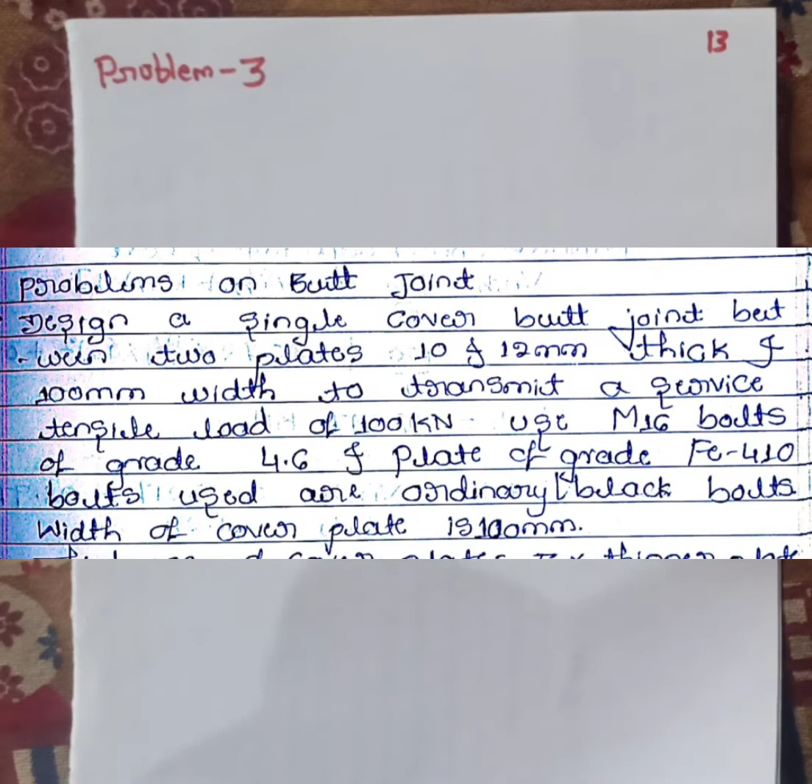Design a single cover butt joint between two plates 10 and 12 mm thick and 100 mm width to transmit a service tensile load of 100 kN. Use M16 bolts of grade 4.6 and plate of grade Fe 410. Bolts used are ordinary black bolts. Width of cover plate is 100 mm. So this is the problem we have here. They are asking us to join two plates with a butt joint, a single cover butt joint, to carry a service tensile load of 100 kilonewton.

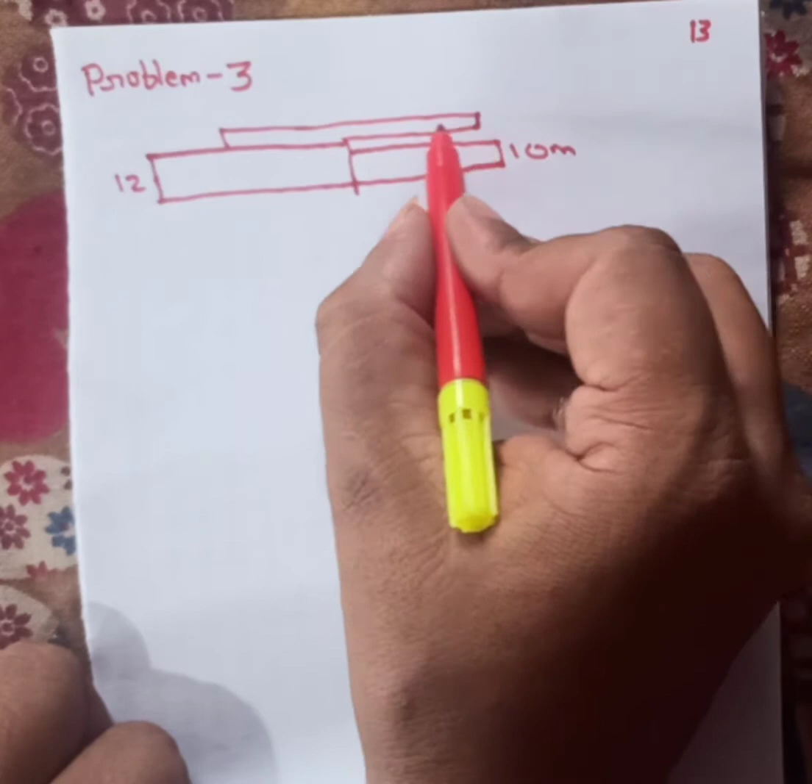So it's a butt joint. I'll draw the figure here. This is one plate, say 12 mm. There is one more plate, 10 mm, and we have one cover plate. So here we need to provide the bolts, whatever number of bolts we are getting.

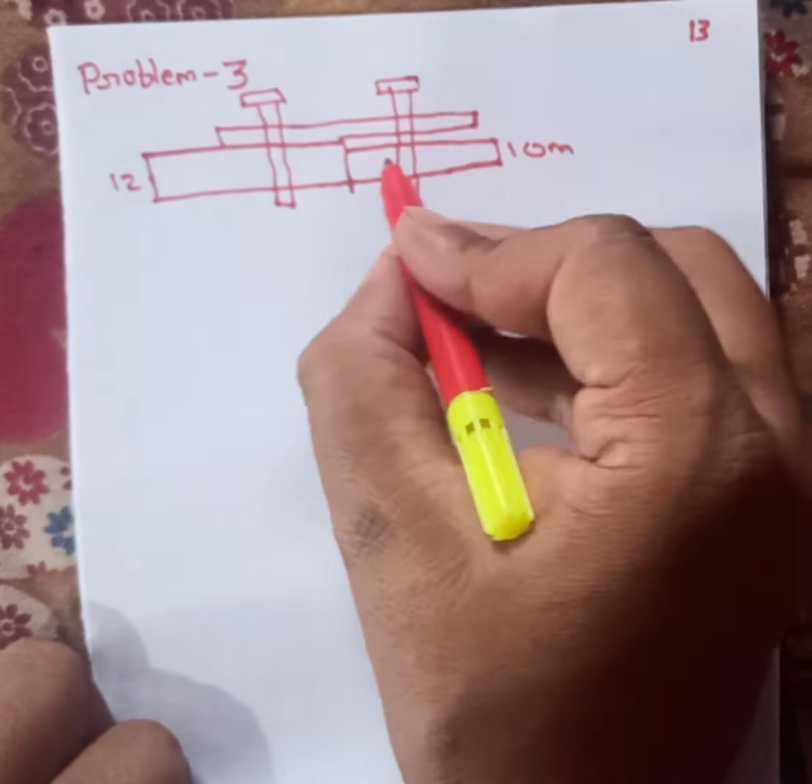So this space is empty, so this portion will be called packing plate. It is 2 mm. If it is more than 6 mm, then there is a correction. Remember, correction for packing plate.

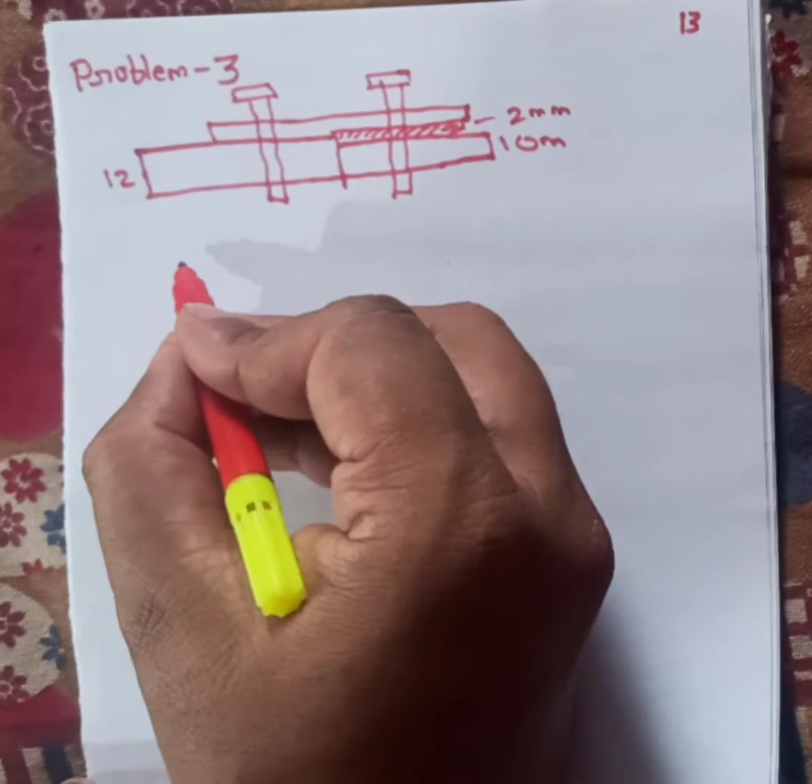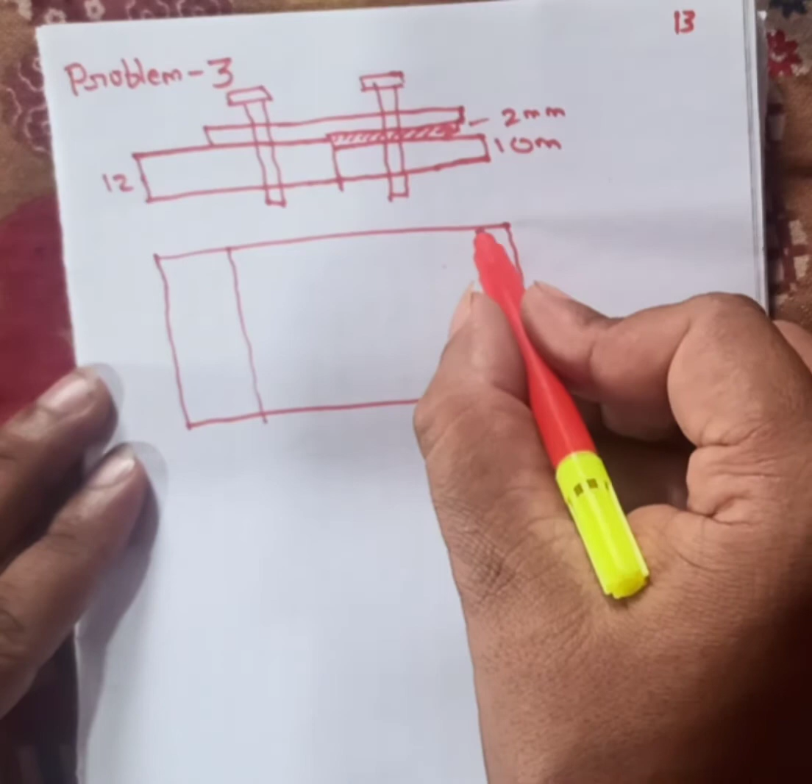Now when I see it from the top, it looks like this. So it looks like this, right? It is 100 mm.

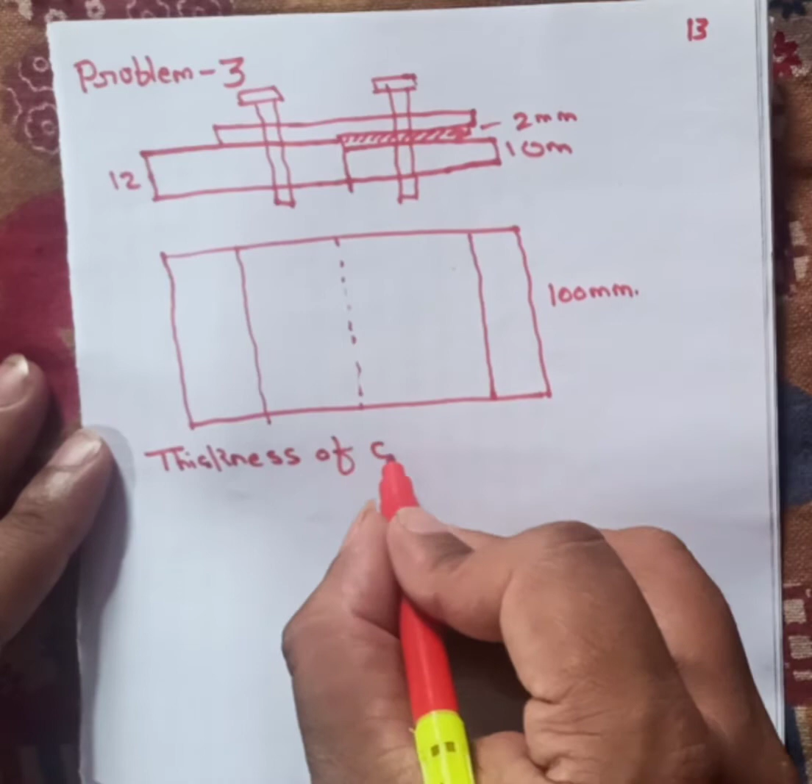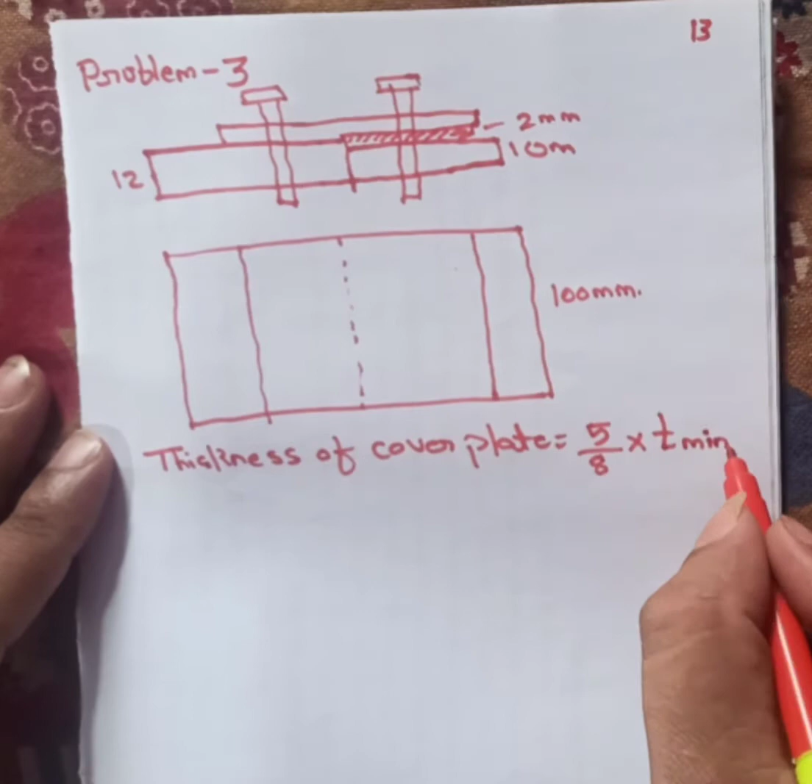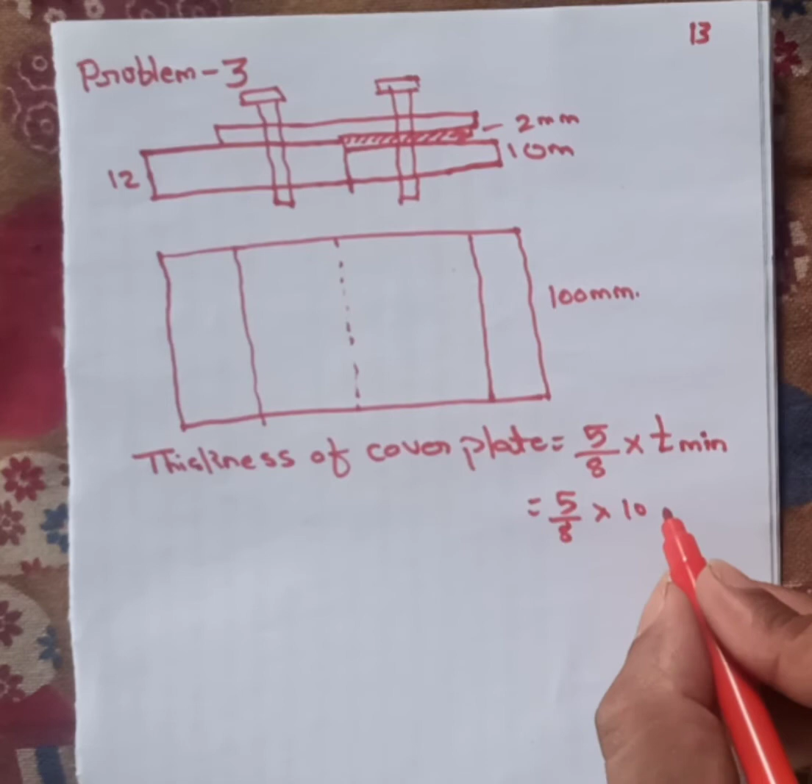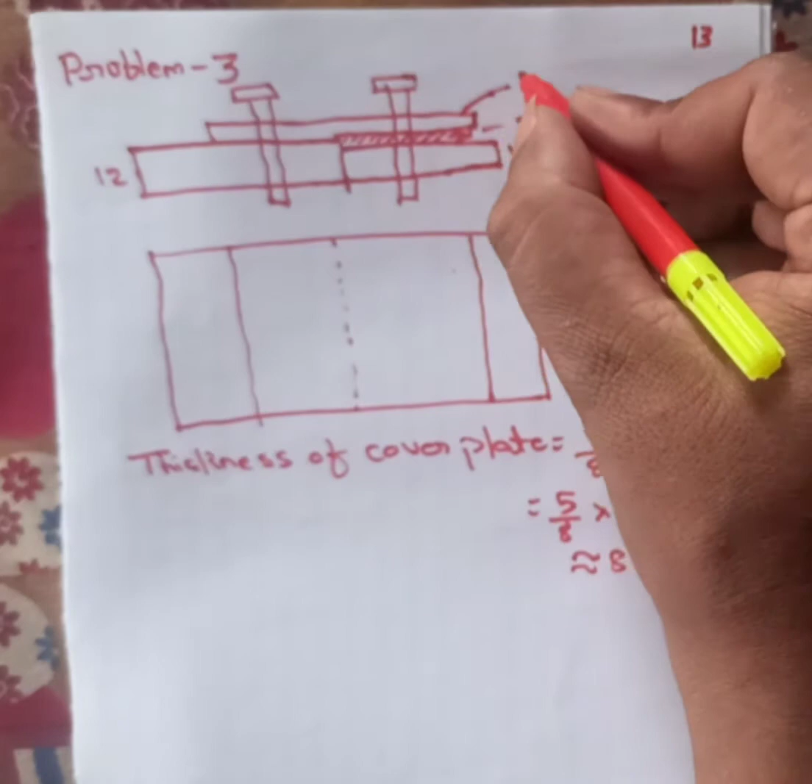They have asked us to use a single cover plate, the thickness of which is not given. So as per IS 800, thickness of cover plate is 5/8 of the thickness of the plate, whichever is minimum. So 5/8 of the 10 mm plate is for the minimum thick plate. It comes around 6.25 mm. So let us provide an 8 mm cover plate. So this plate is 8 mm thick.

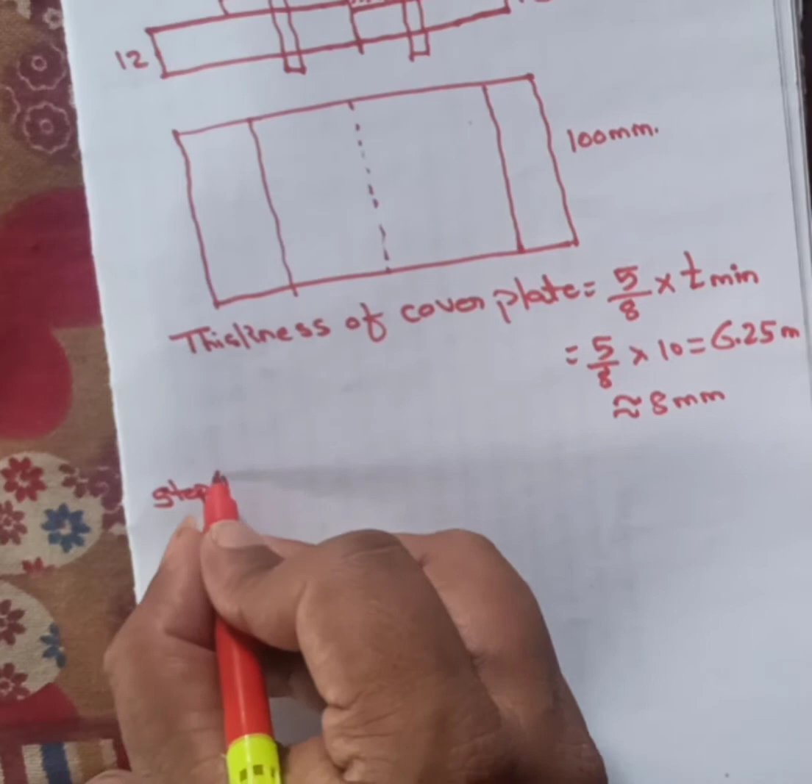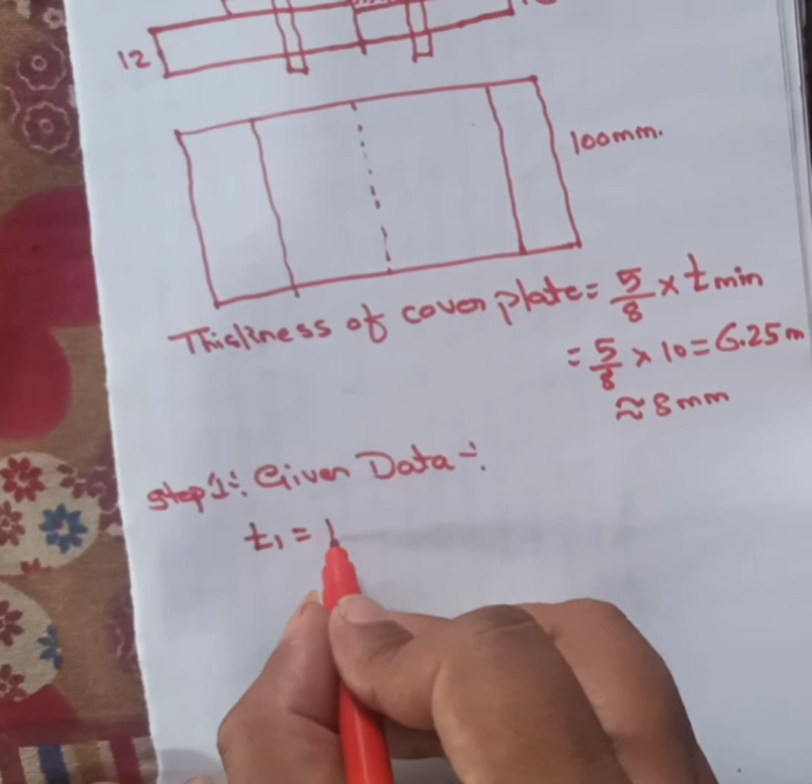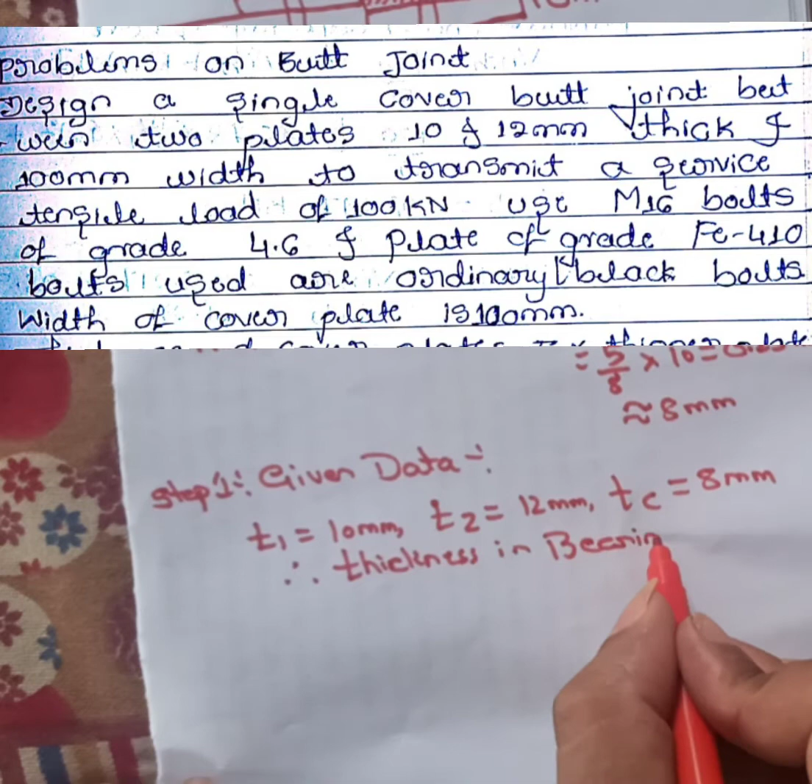So now let us write down the data which we have. In this question we have one thickness as 10 mm, one more thickness as 12 mm, and thickness of cover plate as 8 mm. Therefore, thickness in bearing is the lesser of these, which is 8 mm.

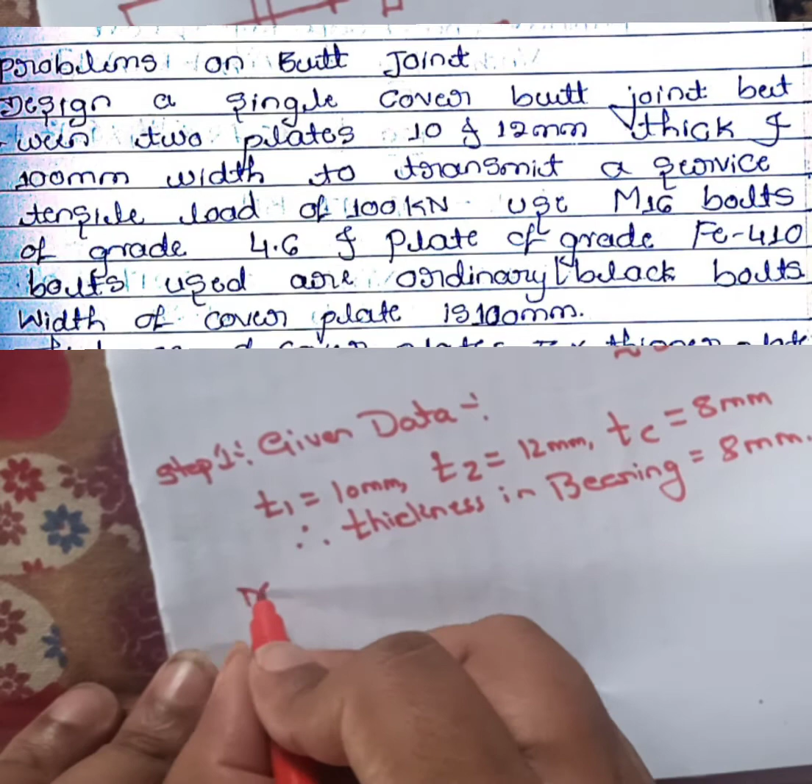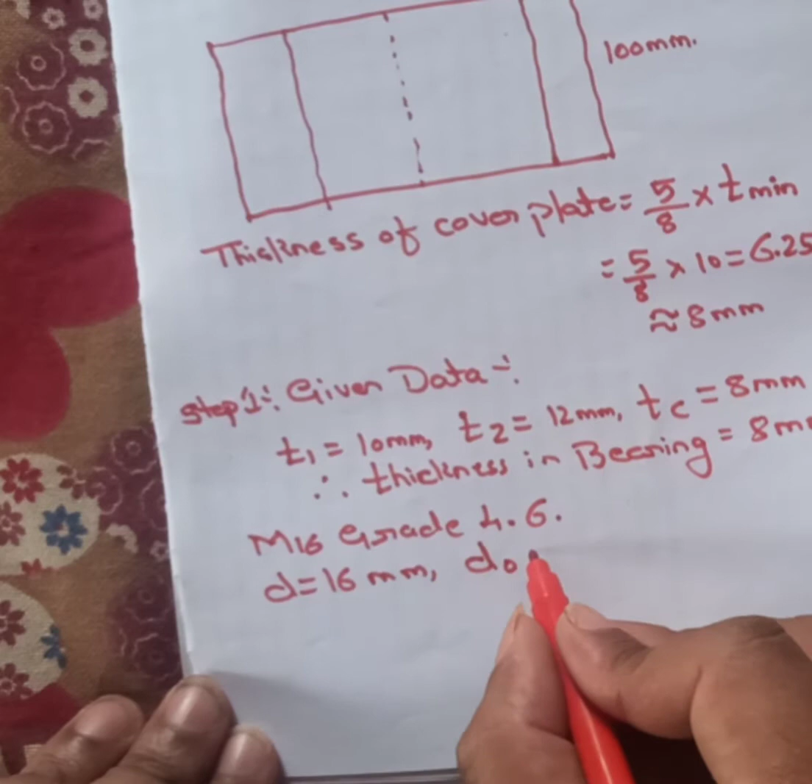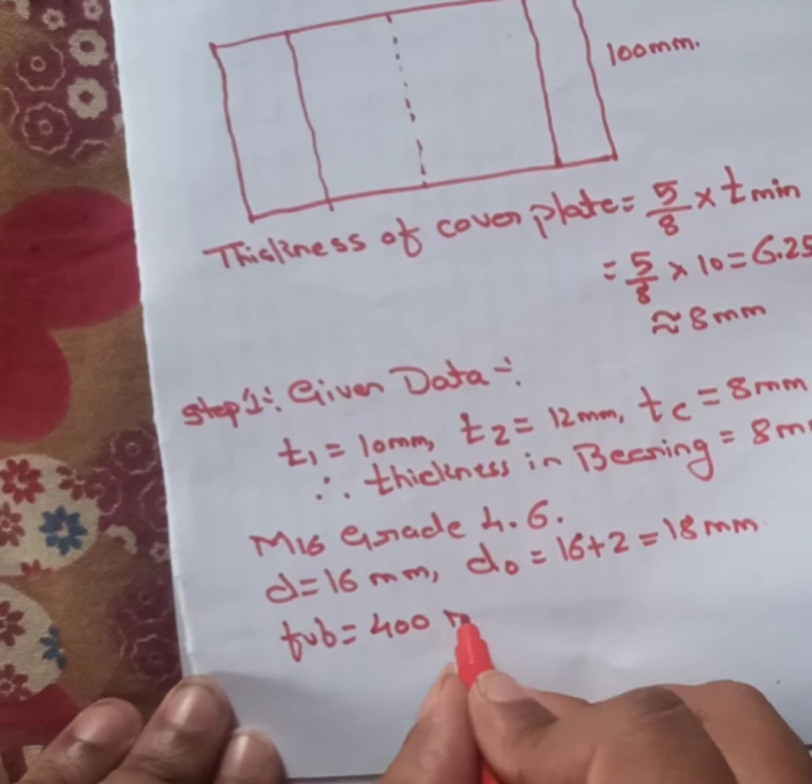Then they have asked us to use M16 grade 4.6. That means D is 16 mm, D naught is 16 plus 2 mm clearance, so it is 18 mm, from table number 19 of IS 800. It is grade 4.6, that means FUB, ultimate strength of the bolt, is 400 MPa. Here it is 4.6, 4 means 400. If it is 5.6, that means FUB will be 500.

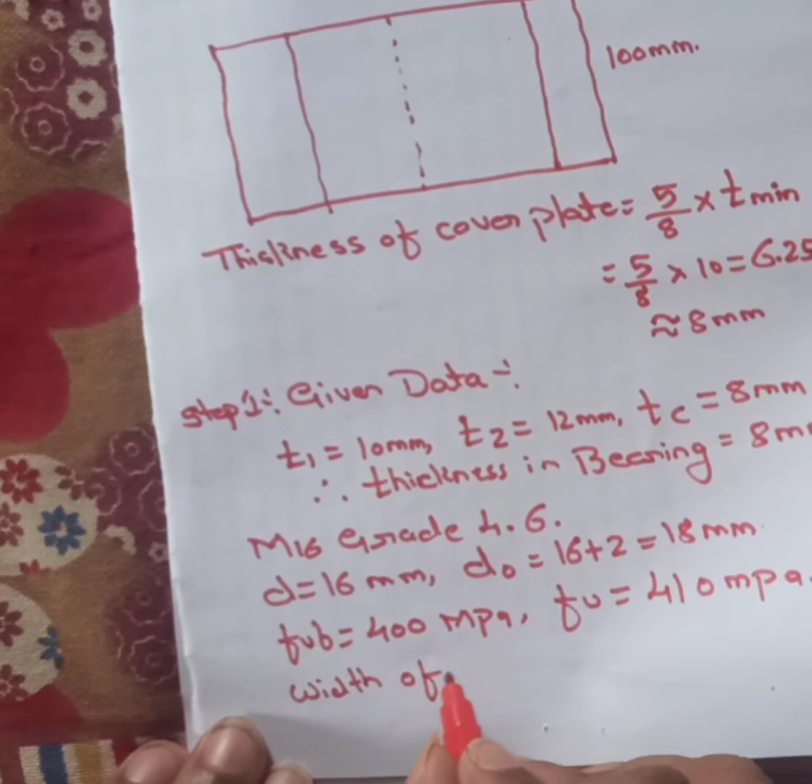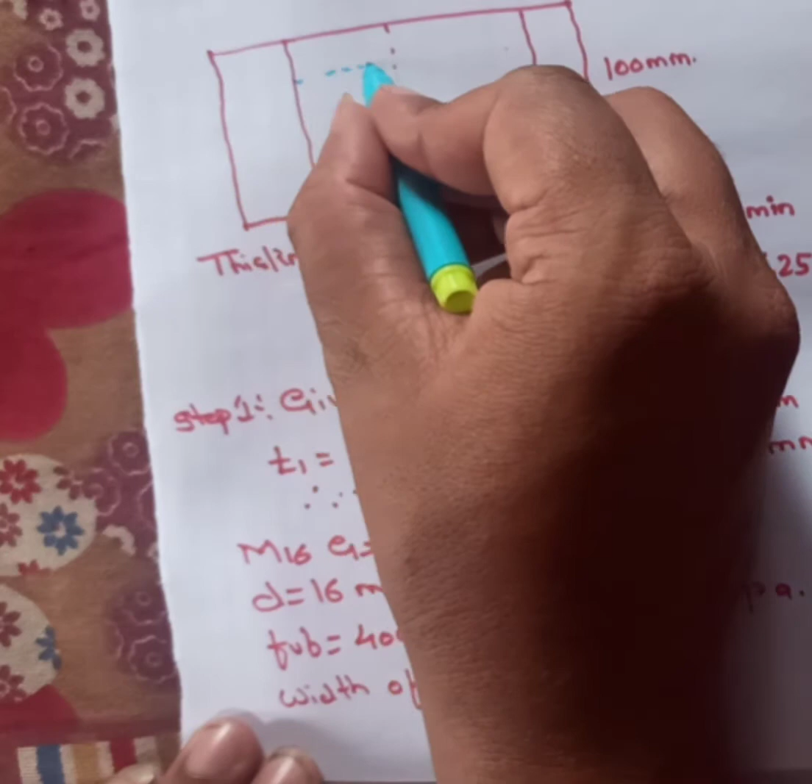Then FU of plate is given as 410 MPa. Thickness of cover plate is also given. Width of cover plate is also given, which is 100 mm. That means the cover plate, when we see it from the top, is here. So whatever cover plate we are providing, it is 100 mm.

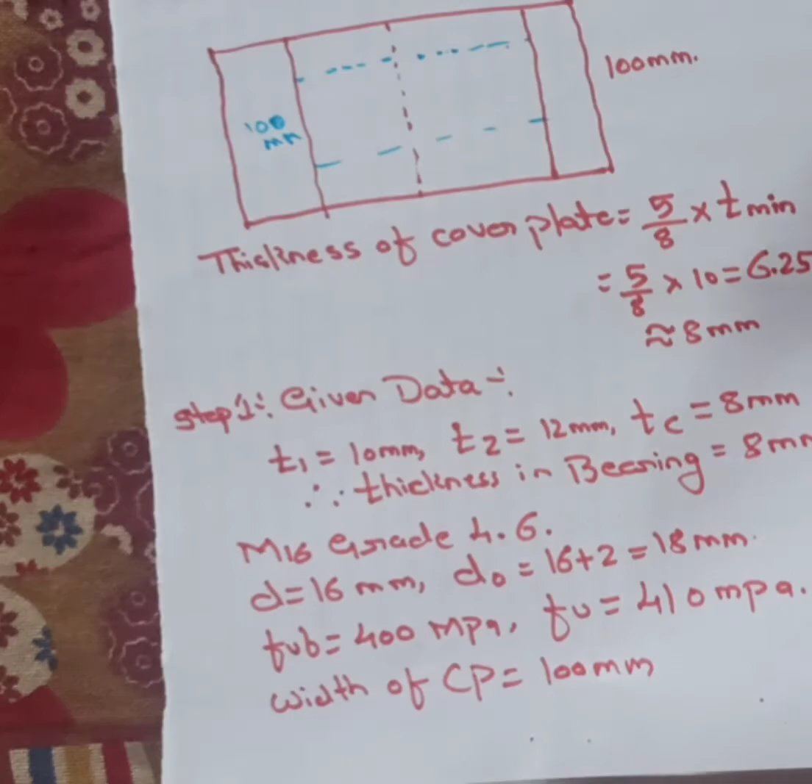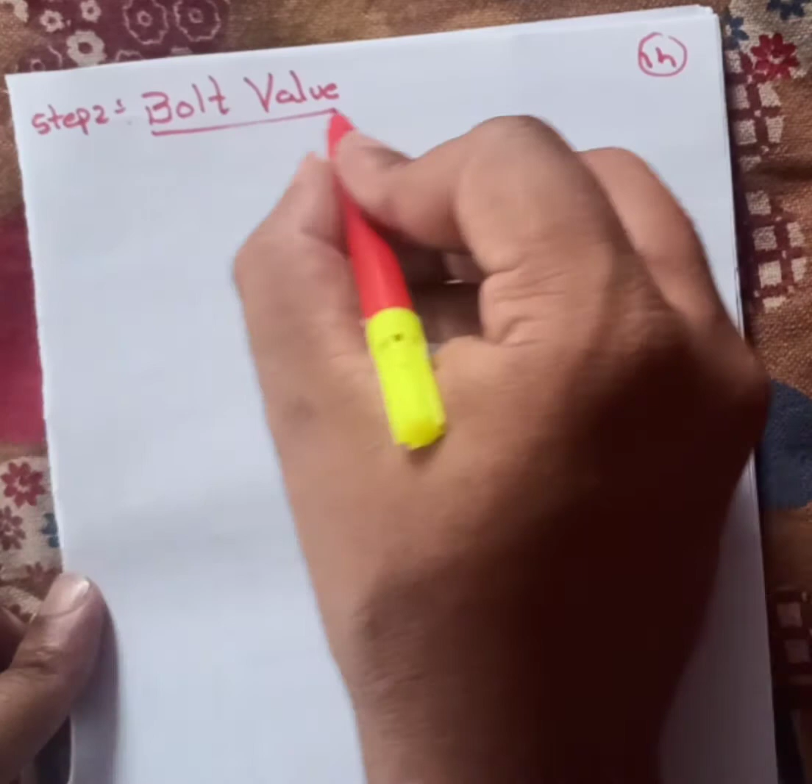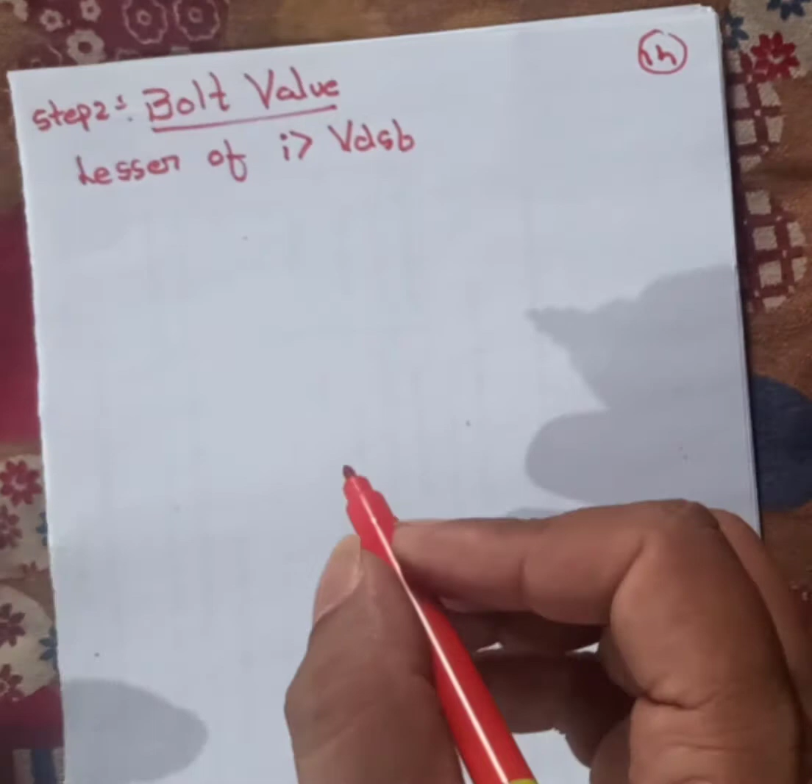Okay, so now we need to design it. That means we need to find the number of bolts, right? So to find the number of bolts, we need the bolt value. Bolt value is the lesser of VDSB, that is design shear capacity of the bolt, or VDPB, design bearing capacity of the bolt.

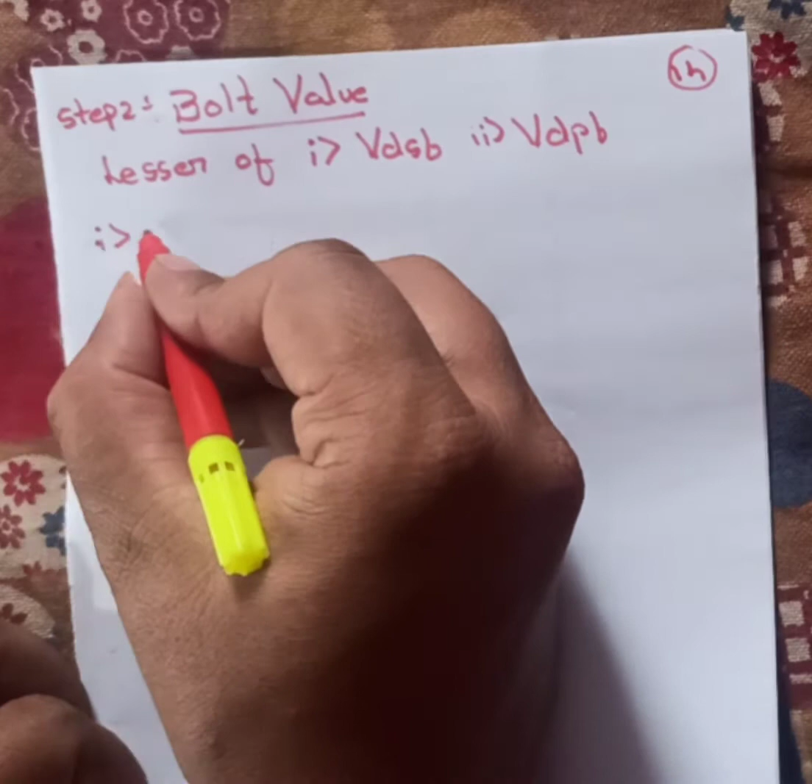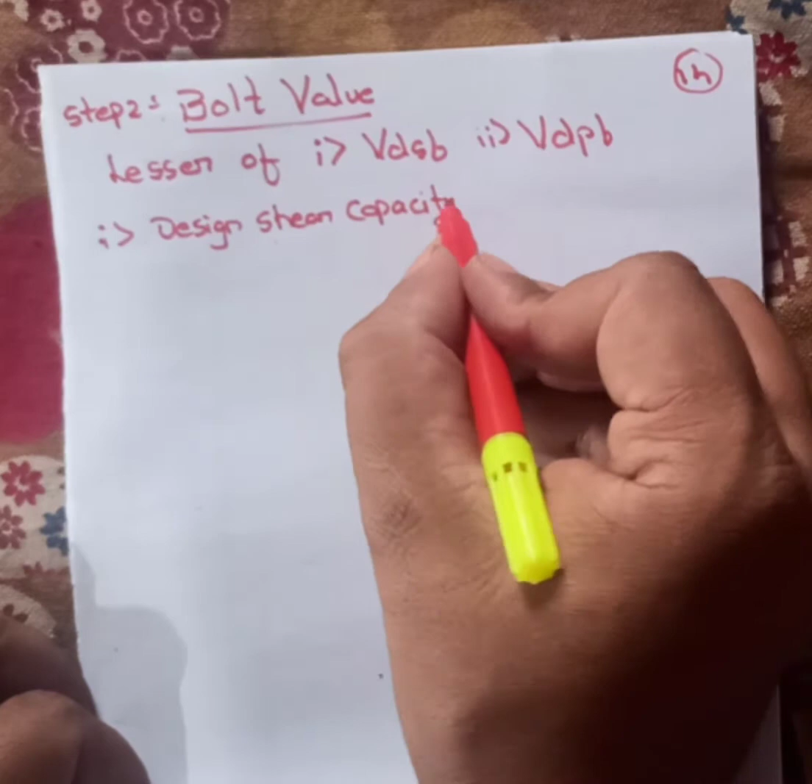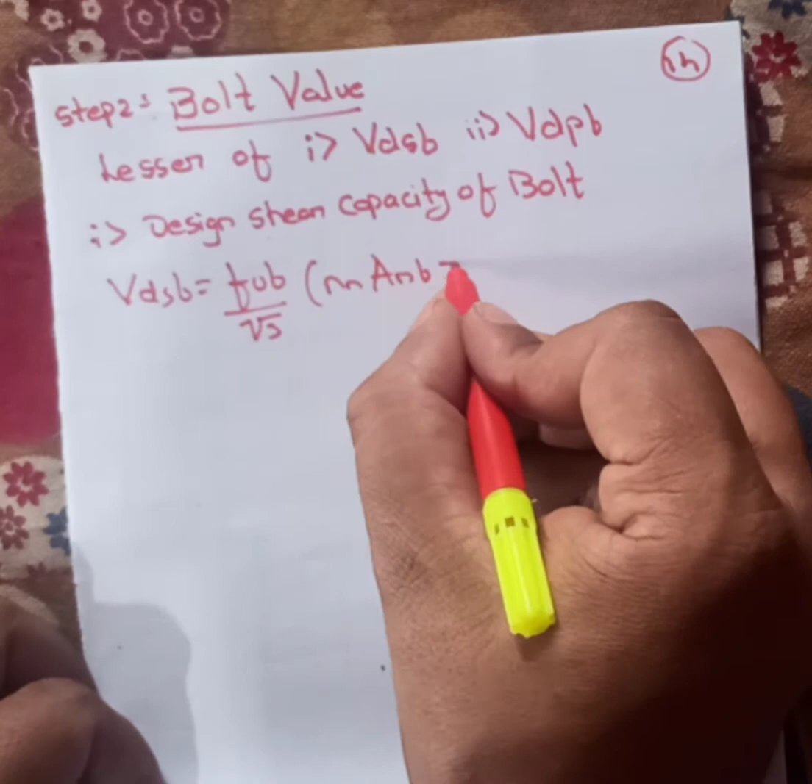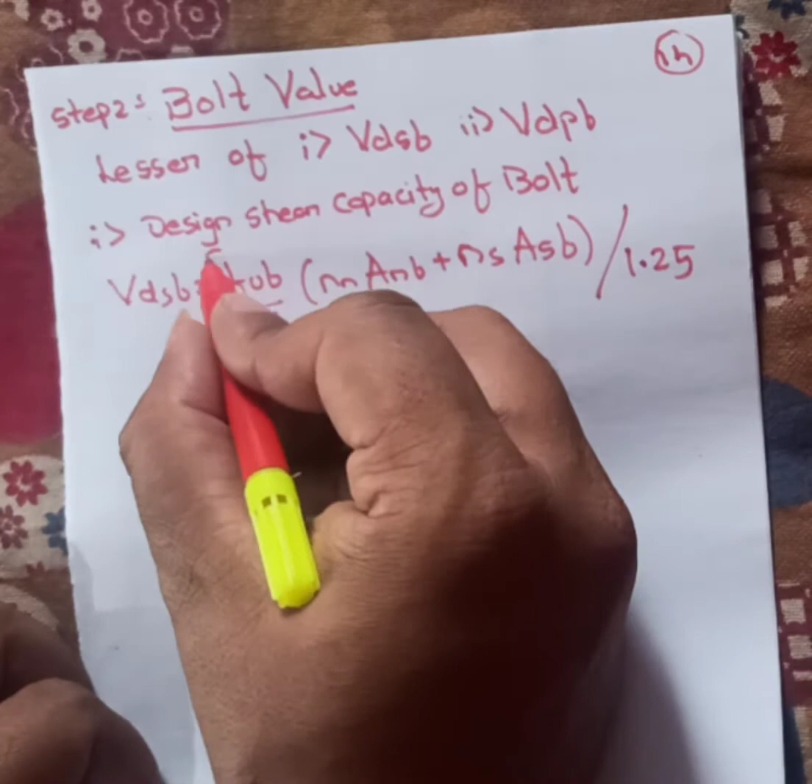So now we need to find these. First, let us find the design shear capacity of the bolt, which is given by VDSB equals to FUB by root 3, NN into ANB plus NS into ASB, whole divided by 1.25, that is partial safety factor. So here FUB is 400 MPa.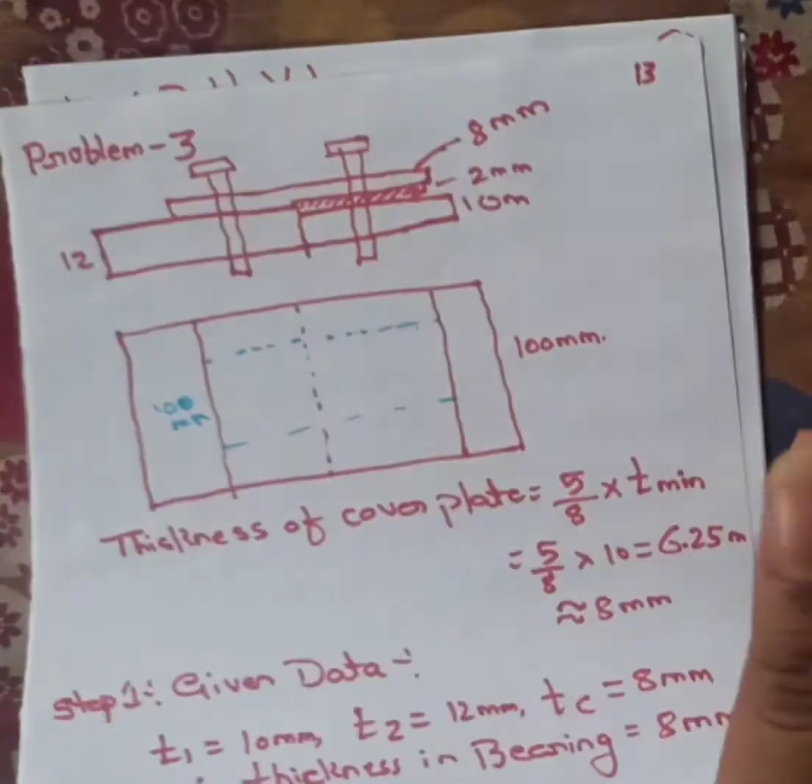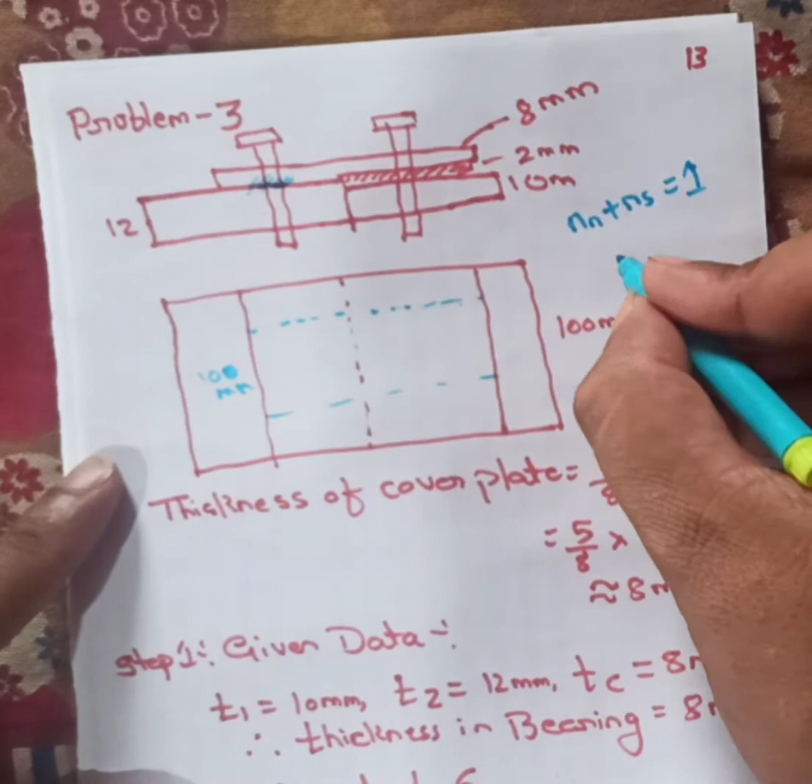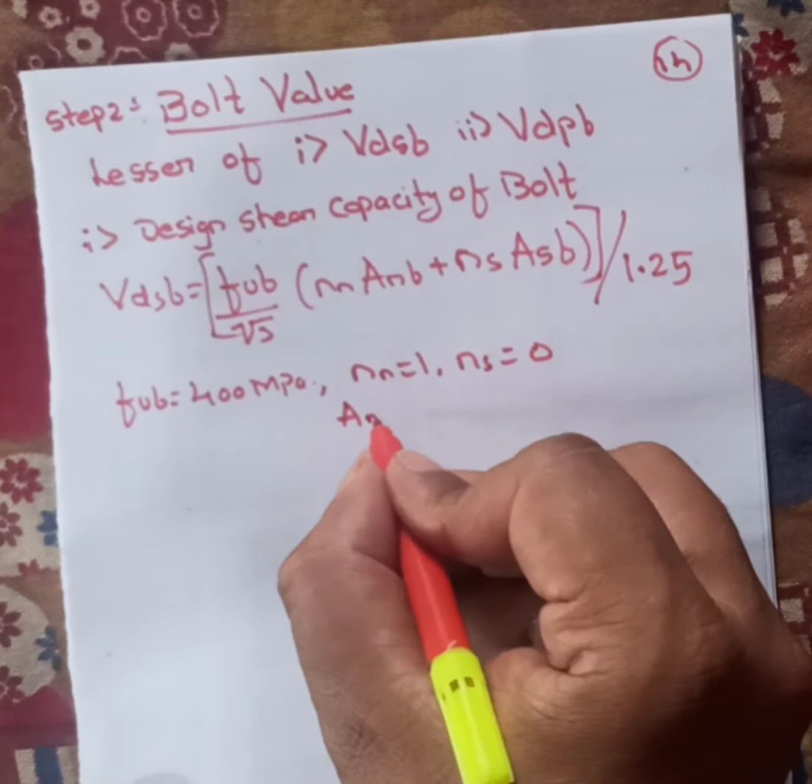NN and NS, so here we have how many shear planes? This bolt will cut only at this location, right? Only at this location it will cut. So number of shear planes, NN plus NS, will be only 1. Again they have not mentioned anything in the question, so we will assume NN equals 1, that is the shear plane is in the thread, and in the shank it is 0. So we are taking NN equals to 1, NS will be 0, ANB will be 0.78 times pi d square by 4, where d is 16 mm. Substituting all these values, we will get VDSB as 28.97 kilonewton. So this is the answer we have.

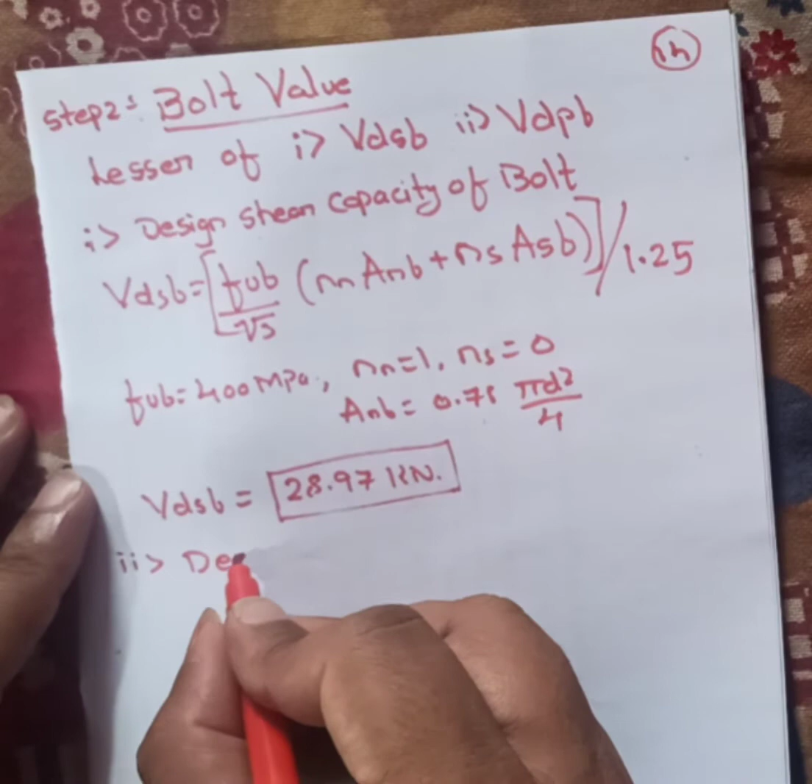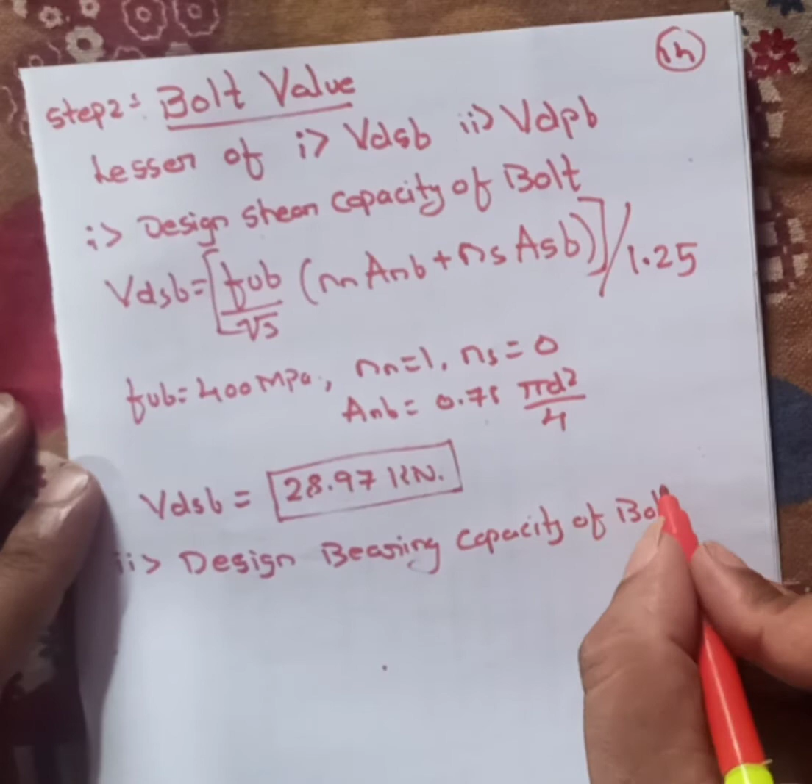Next, let us find out the design bearing capacity of the bolt, which is given by VDPB equals to 2.5 times KB D T FU divided by the partial safety factor.

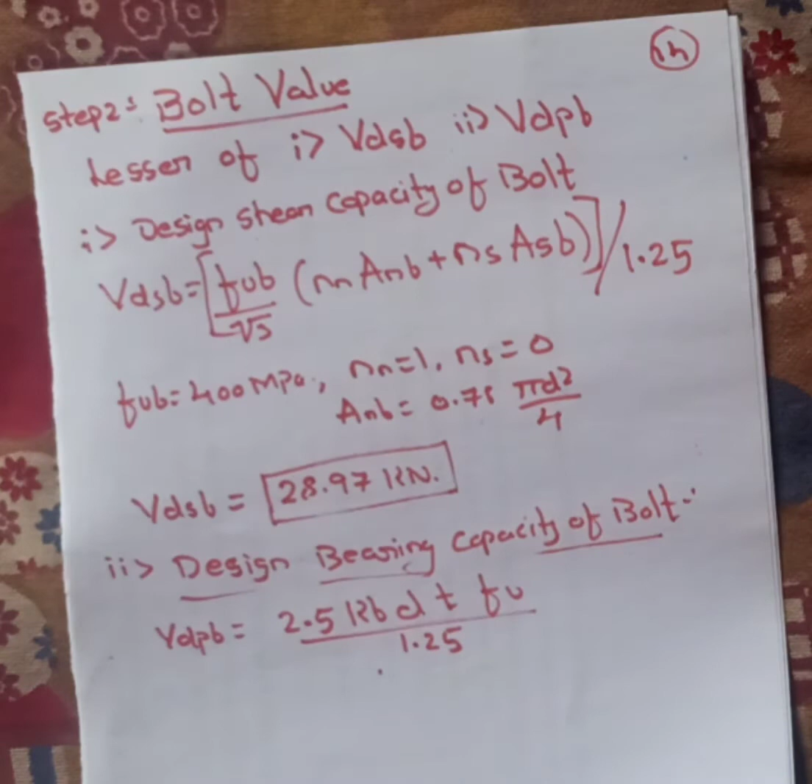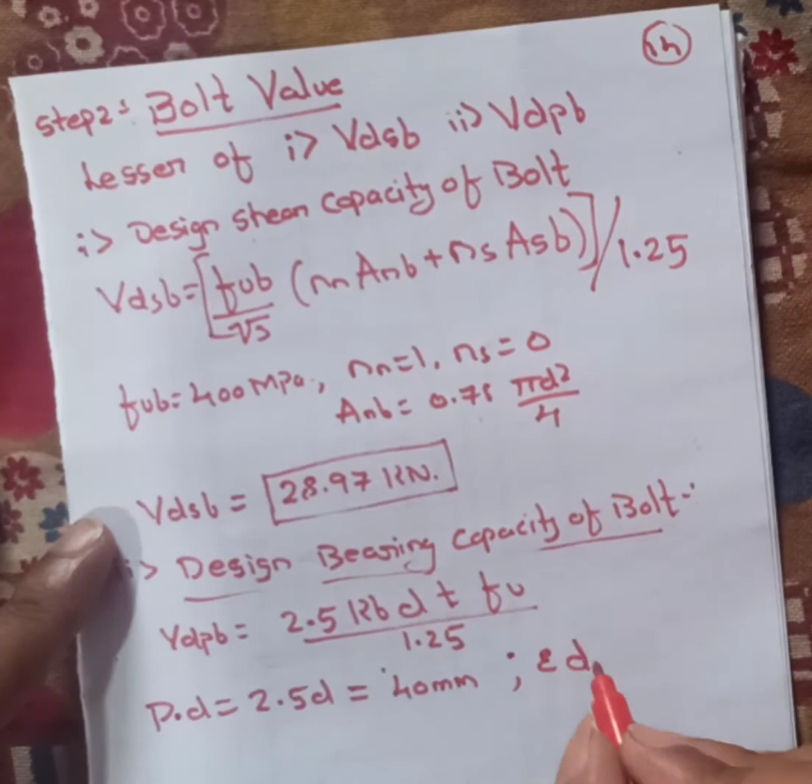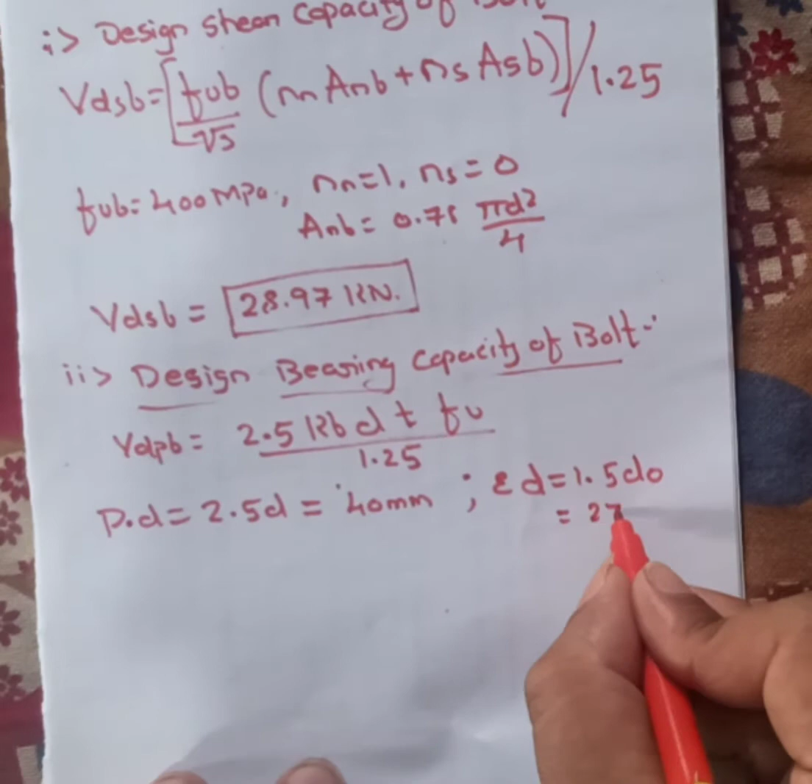So here we know the diameter of the bolt, so let us first fix the edge distances and pitch distances. Pitch distance, given by 2.5 times D, is around 40 mm. Then let us fix the edge distance, which is 1.5 times the diameter of the hole, which is 27 mm. Let us consider it as 30 mm.

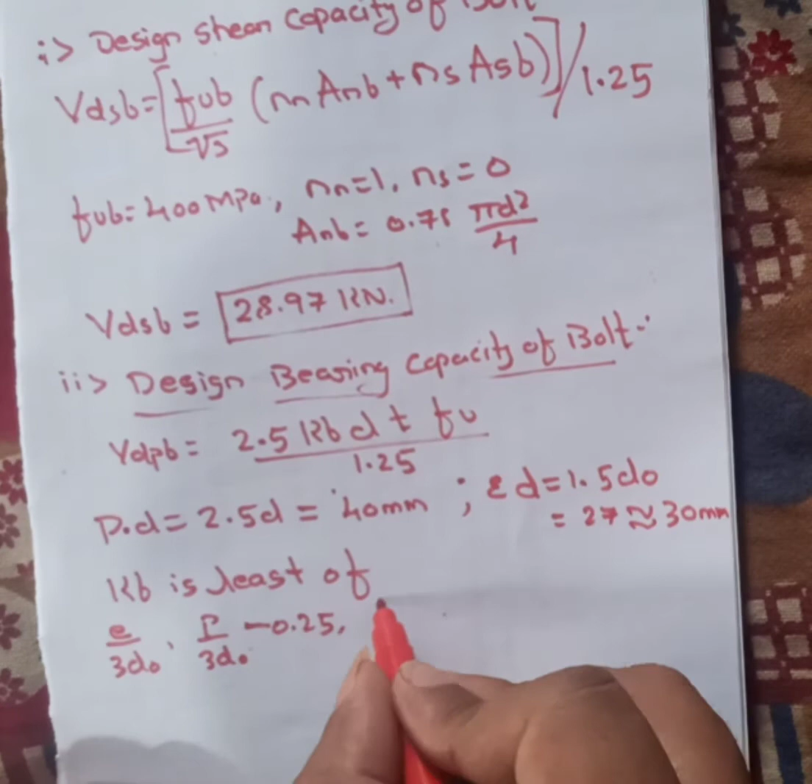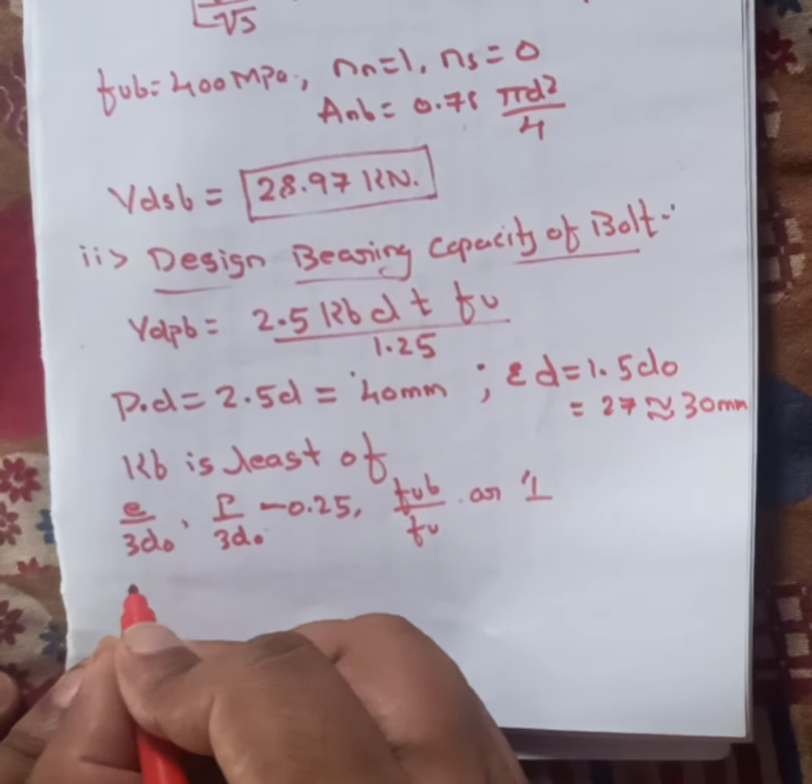Now we can find KB, which is the least of E by 3D naught, P by 3D naught minus 0.25, FUB by FU, or 1. Substituting edge distances and pitch distances, we get the answers 0.55, 0.49, 0.97 and 1. The least one is this, so this is the value of KB.

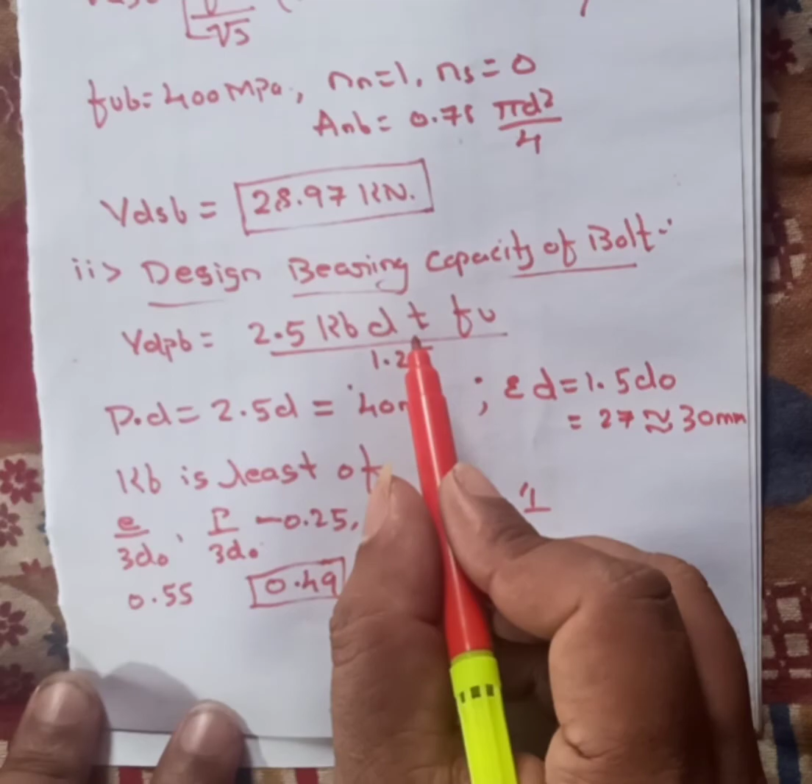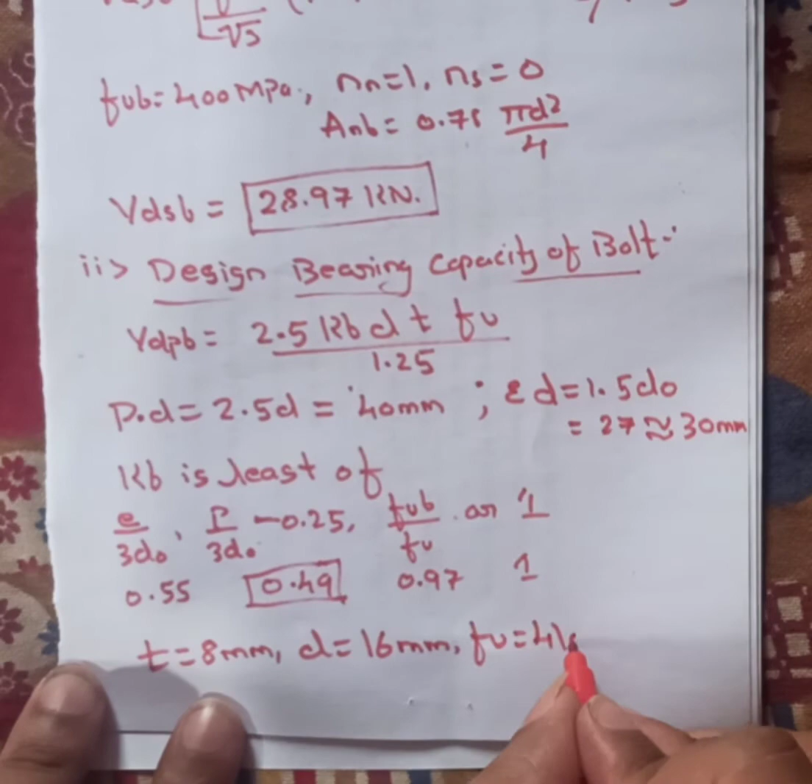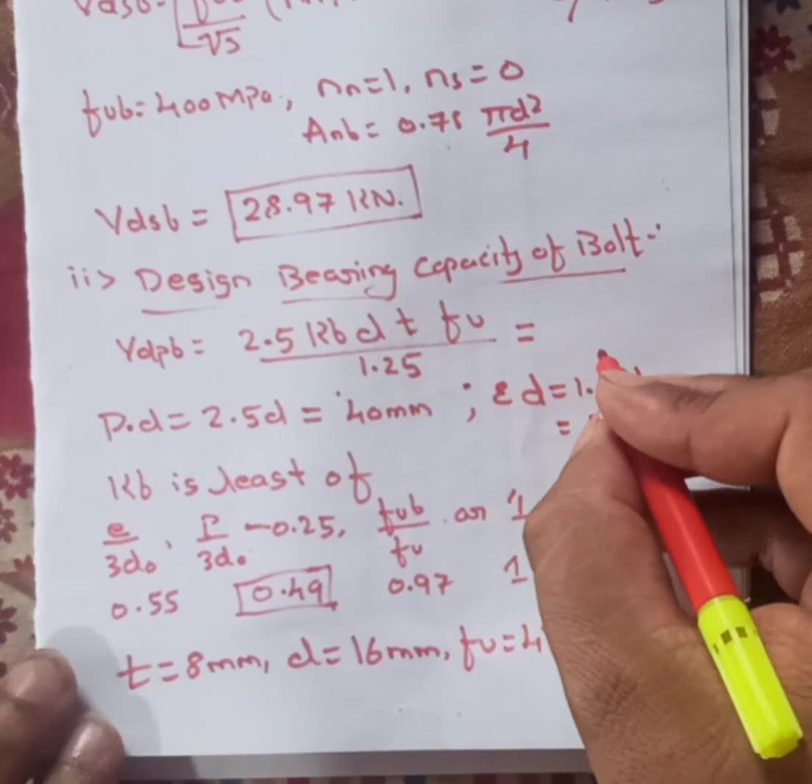D is 16 mm. T is the summation of thicknesses bearing in the same direction, so that is the lesser one. We have 3 thicknesses available: 12, 10 and 8. So the lesser one is 8, T will be 8 mm. D is 16 mm. And FU is 410 MPa. Substituting all these values in this formula, we get the answer for VDPB, which is around 50.17 kilonewton. So this is the answer we have.

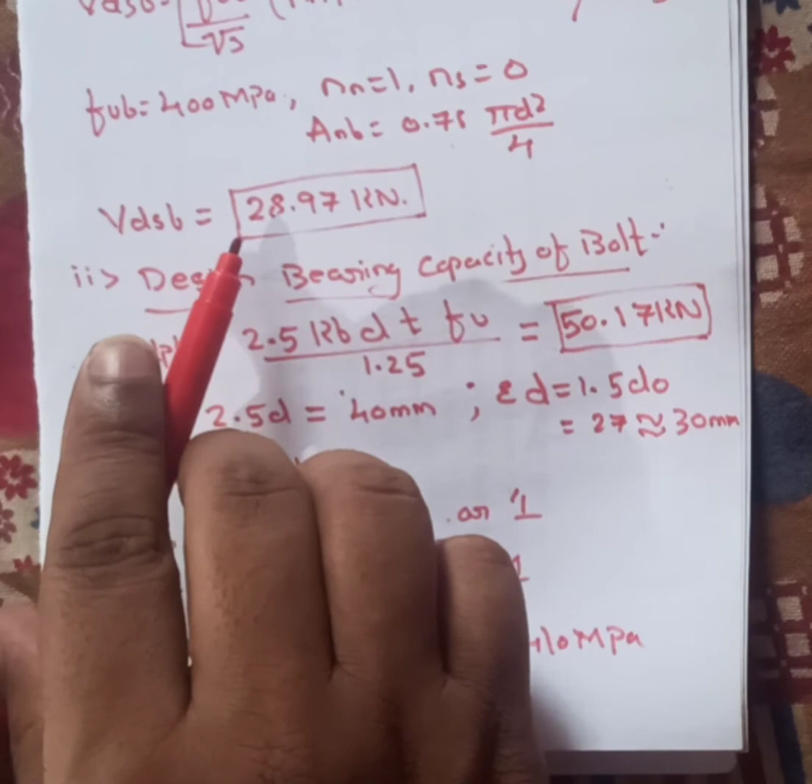So therefore the bolt value is the lesser one, either shear or bearing. We have shear capacity as 28.97, hence the bolt value is 28.97 kilonewton. I'll just write it down here. So therefore bolt value is 28.97 kilonewton. That means one bolt will take a load of 28.97 kilonewton. Once the load reaches this value, the bolt will fail in shear, not bearing. So whatever may be, whether it fails in shear or bearing, the joint will fail, so we have to consider the least one.

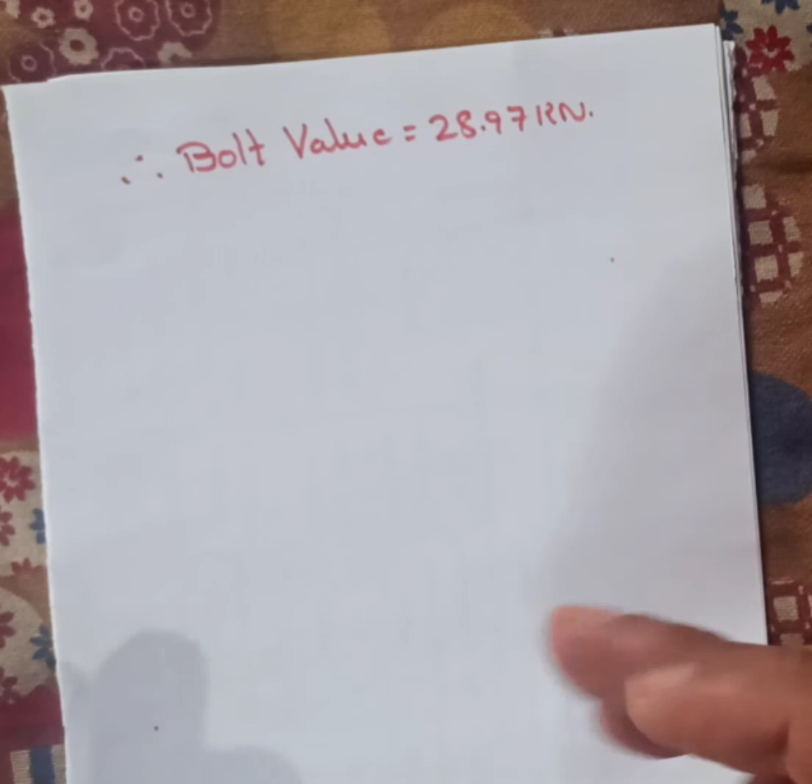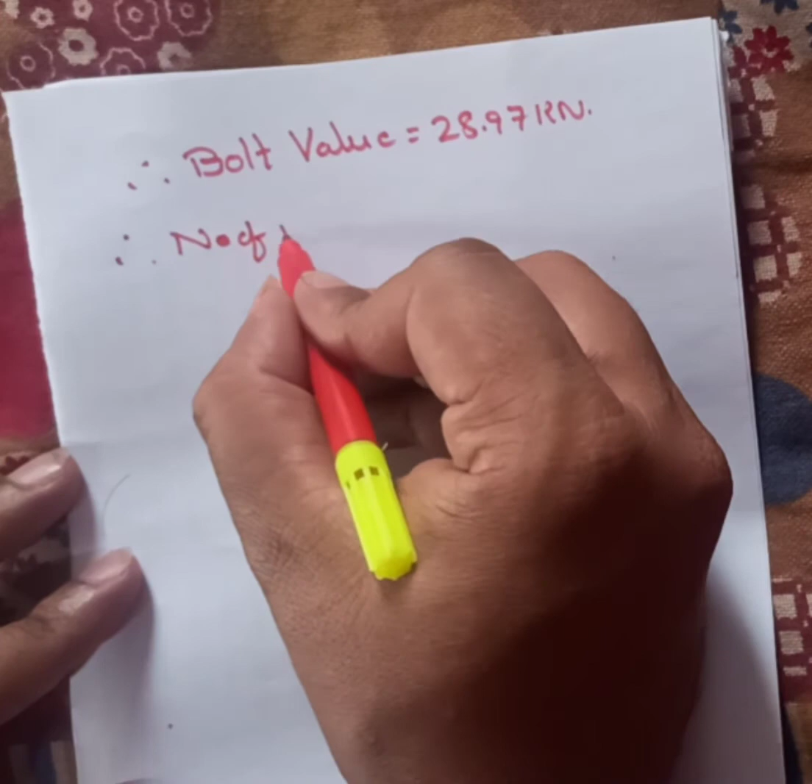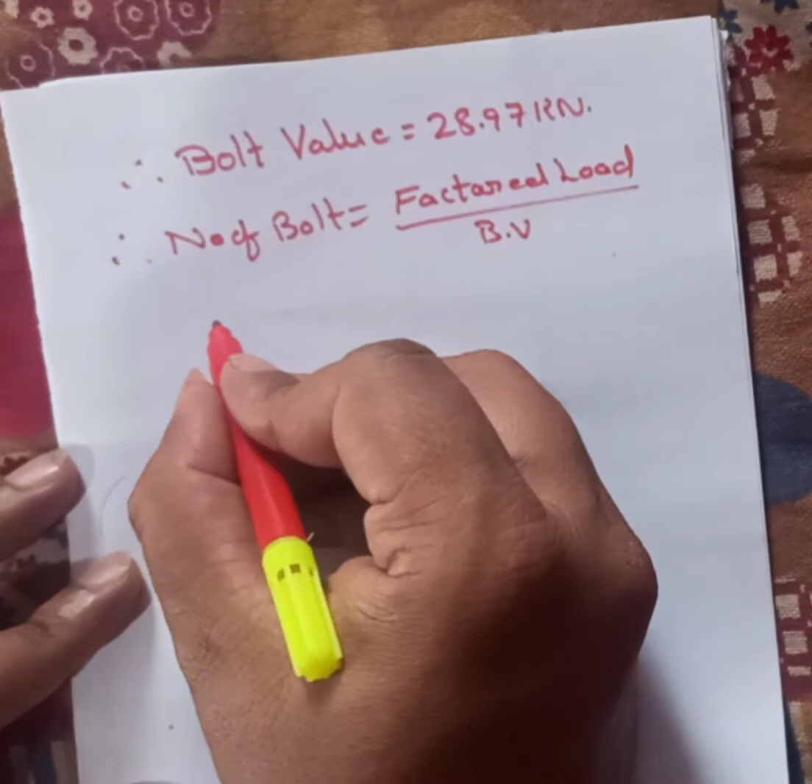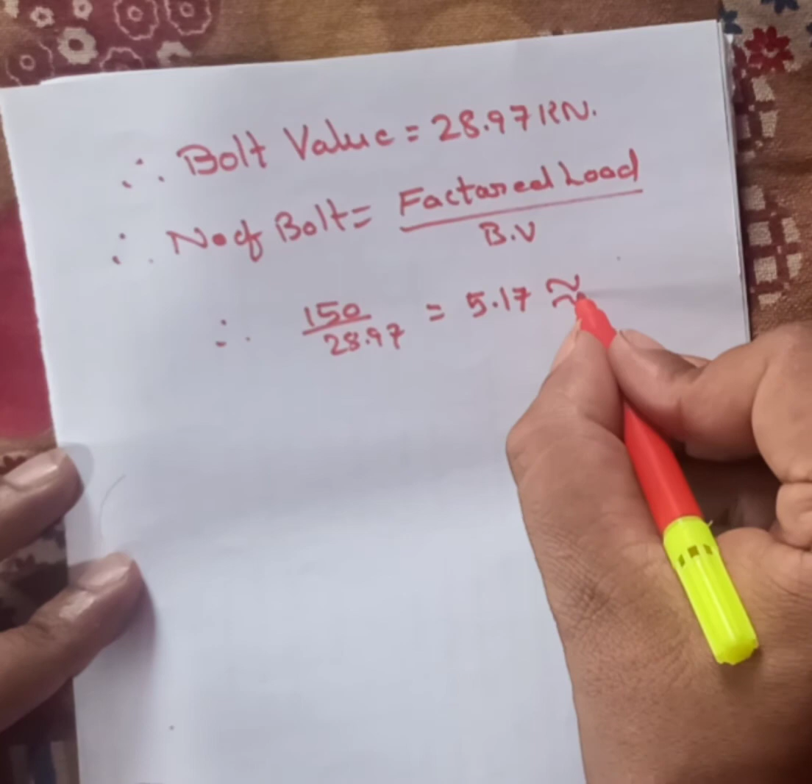So now it has to carry a total load - one bolt will take a load of 28.97 kilonewton, and the total load coming on the joint is 150 kilonewton. Therefore number of bolts will be factored load divided by bolt value, so 150 divided by 28.97, which we are getting around 5.17. So let us provide 6 numbers of bolts.

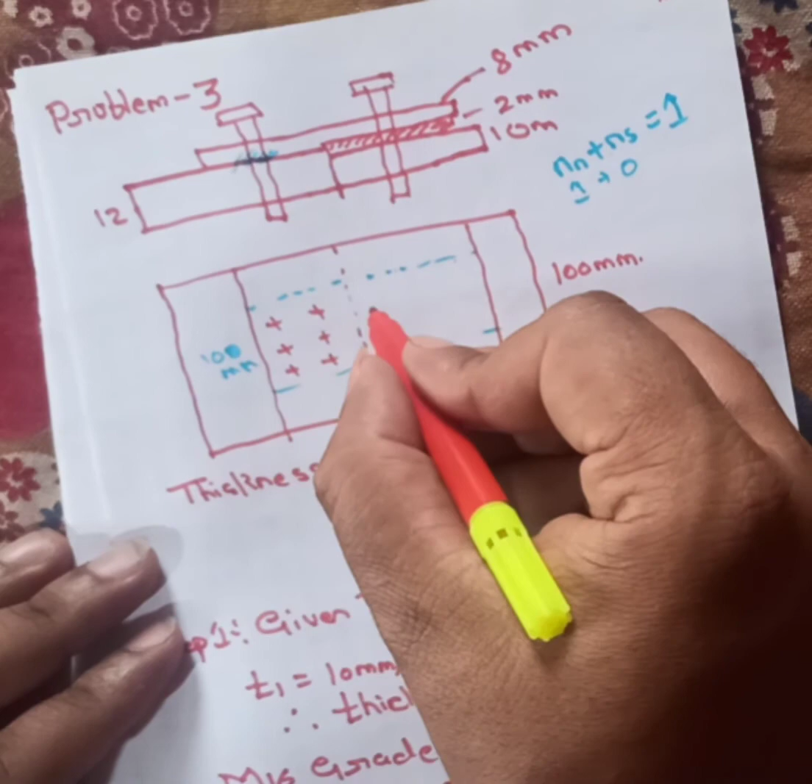So 6 numbers we have to provide. Let us provide 6, 1 2 3 4 5 6, like this. So here completes the problem for a single cover butt joint.